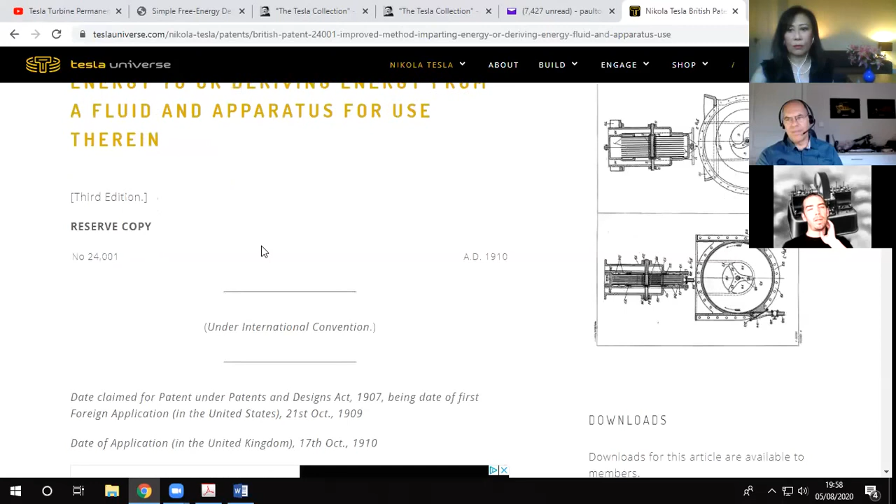Right, I'm just going to open the British patent. Wrong page. Yeah, okay. So a lot of people don't realise that the British patents are not actually the same as the American patents, and therefore they're overlooked completely. Also, there's British patents that don't exist anywhere else. I think this is because Tesla wasn't getting any sort of problem from the British Patent Office, so he decided that this was the place where he was going to unload some other information that he wasn't going to unload anywhere else. I'm just going to go down.

I'm just going to highlight it here. It says, I'm aware that it has already been proposed to effect atomizing by dropping a liquid on a plate rotating about a substantially vertical axis, and I make no claim to the arrangement.

Now, at the bottom of the patent, he left the next clue, where it's got reference has been directed in pursuance of Section 7, subsection 4 of the Patents and Designs Act 1907 to specification number 696 of 1867.

Now, I managed to obtain this patent from the British Patent Office, and it's really interesting that it was a device fitted to Queen Victoria's ship called the Water Witch, and nobody knew how this ship was able to go at such high speeds - it was using the same principles as this patent. The patent is called Improved Method of Imparting Energy to or Deriving Energy from a Fluid and Apparatus for Use therein. The patent from 1867 has almost got the same name as that.

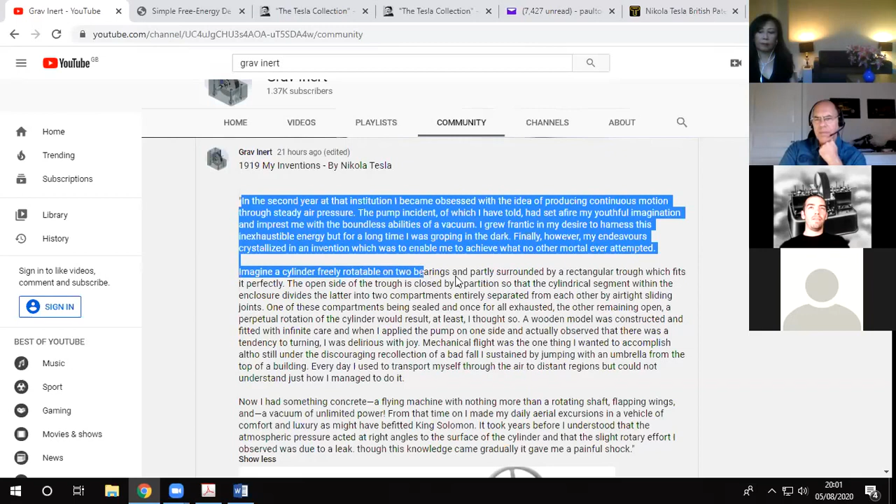It said: In the second year at that institution, I became obsessed with the idea of producing continuous motion through steady air pressure. The pump incident of which I have told had set afire my youthful imagination and impressed me with the boundless abilities of vacuum. I grew frantic in my desire to harness this inexhaustible energy, but for a long time I was groping in the dark. Finally, however, my endeavours crystallised in an invention which was to enable me to achieve what no other mortal ever attempted. Imagine a cylinder freely rotatable on two bearings and partly surrounded by a rectangular trough which fits it perfectly.

The open side of the trough is closed by a partition so that the cylindrical segment within the enclosure divides the latter into two compartments, entirely separated from each other by airtight sliding joints. One of these compartments being sealed and once for all exhausted, the other remaining open, a perpetual rotation of the cylinder will result - at least I thought so. A wooden model was constructed and fitted with infinite care, and when I applied the pump on one side and actually observed that there was a tendency to turning, I was delirious with joy.

Mechanical flight was one thing that I wanted to accomplish, although still under the discouraging recollection of a bad fall I sustained by jumping with an umbrella from the top of a building. Every day I used to transport myself through the air to distant regions, but could not understand just how I managed to do it. Now I had something concrete, a flying machine with nothing more than a rotating shaft, flapping wings and a vacuum of unlimited power.

From that time on, I made my daily excursions in a vehicle of comfort and luxury as might have befitted King Solomon. It took years before I understood that the atmospheric pressure acted at right angles to the surface of the cylinder, and that the slight rotary effort I observed was due to a leak. Though this knowledge came gradually, it gave me quite a painful shock.

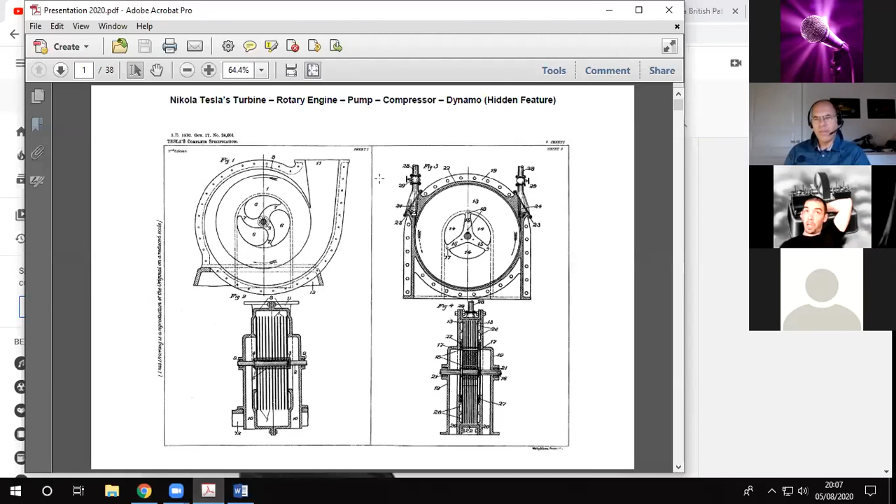Okay, the most important things to remember then. Pontus, can you find that? Yeah, thank you, that was a bit weird. Yeah, I thought it was my computer. No, yeah, thank you Paul. Go ahead. Yeah, okay, yeah, I've prepared—I didn't really have like, Crystal. Me and Crystal didn't speak that long ago, so I've not had masses of time to prepare.

But I have prepared some stuff that I want to go over—mainly stuff that's kind of unknown, really. It's because the British patents weren't found until 1998, and the US patents were actually split into 4 patents. 2 patent applications were denied, whereas the British patent wasn't. So in this patent that I've got open now, which is the diagram from the British patent, there are actually 5 machines within this diagram. One of them's a hidden feature. The turbine is pretty well known.

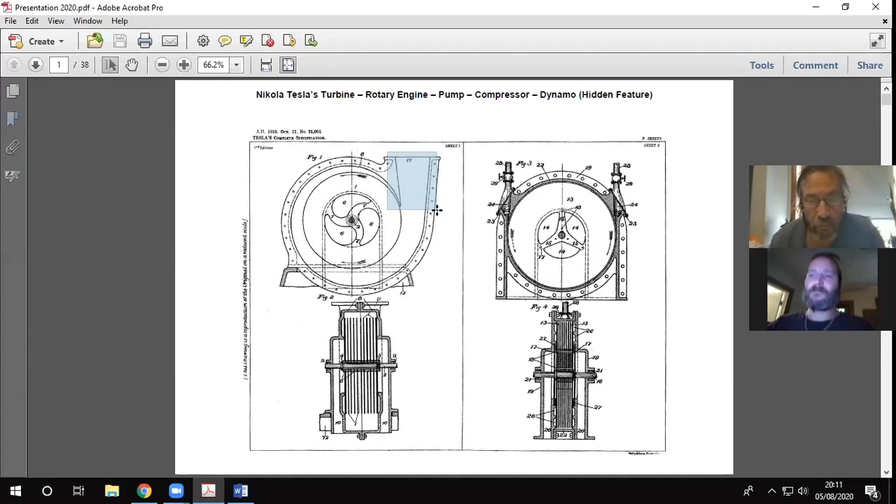So the pump or the compressor will pull a vacuum, but the pump will give cold air, whereas the compressor will give compressed air. Compressed air generally, the more compressed it is in a piston engine, there's a lot of friction to make it. So this isn't using friction by using a piston; it's using the spiral path getting tighter and tighter and tighter.

Now, the next machine that isn't known is a hidden feature. One of Tesla's, I suppose you could say it was a secret there to be found if you replicated his machines, because each of his patents is actually a lesson. If you copy the text and copy the diagram, the words that don't make sense will make sense.

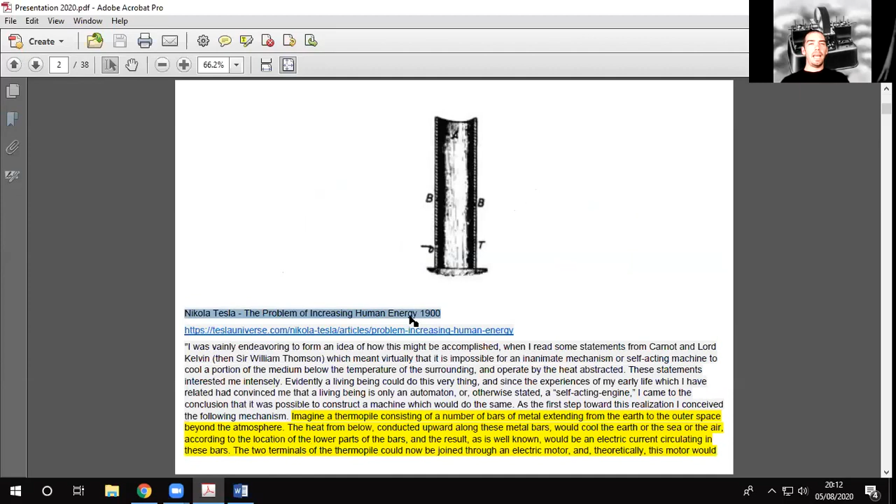So the first time I found any reference to this was in The Problem of Increasing Human Energy, which was written in 1900. Probably one of Tesla's most detailed articles. There's a link there. I'm not sure how I can put that in, but I'll carry on.

Right, I won't read all of this, but I'll read some of it. I was vainly endeavouring to form an idea of how this might be accomplished when I read some statements from Carnot and Lord Kelvin, then Sir William Thomson, which virtually meant that it is impossible for an inanimate mechanism or self-acting machine to cool a portion of the medium below the temperature of the surrounding and operate by the heat abstracted. These statements interested me intensely.

Evidently, a living being could do this very thing. And since the experiences of my early life, which I have related, had convinced me that a living being is only an automaton, or otherwise stated, a self-acting engine, I came to the conclusion that it was possible to construct a machine which would do the same. As the first step towards this realization, I conceived the following mechanism.

Right, this is the bit relating to the dynamo. Imagine a thermopile consisting of a number of bars of metal extending from the Earth to the outer space beyond the atmosphere. That's what this diagram is talking about. There's two bars extending from the Earth to the atmosphere.

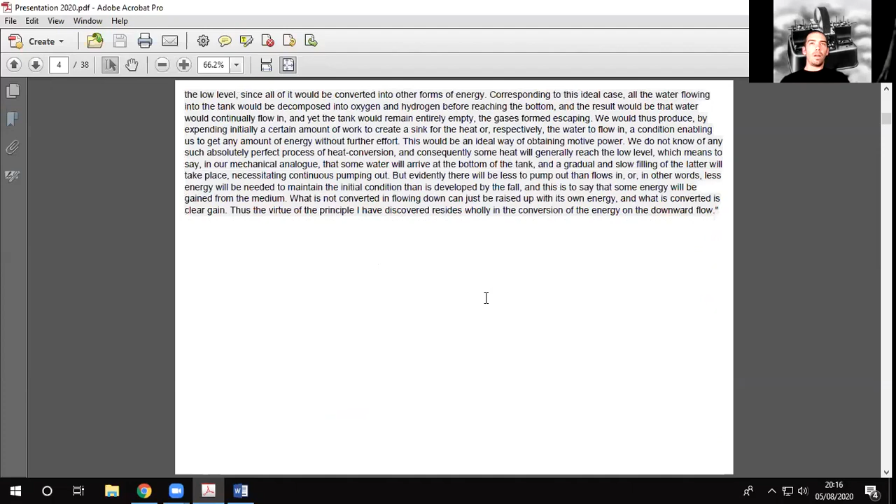Now, the next reference I found of the turbine being in fact a dynamo is going back to Tesla's work in 1891. He's got an article called Notes on a Unipolar Dynamo by Nikola Tesla, and that was in the Electrical Engineer. This is the earliest reference I can find, and there's a couple of little bits I've highlighted where he says, we may explain the operation of such motor just as we can that of a water wheel.

Another one is giving currents of one direction without the employment of commutating devices and at right angles, which was also discussed. I'm just going to open another link.

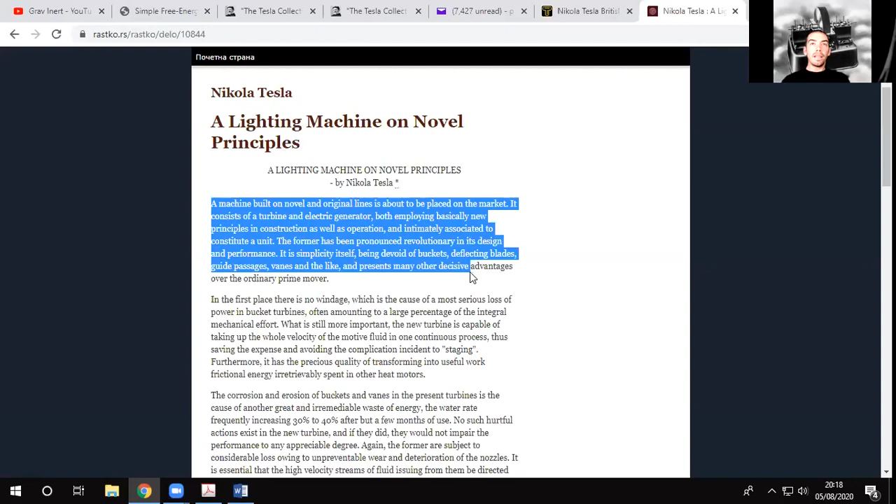This was the next reference I found, that the machine's a dynamo, and this is called a lighting machine on novel principles. A machine built on novel and original lines is about to be placed on the market. It consists of a turbine and electrical generator, both employing basically new principles in construction as well as operation, and intimately associated to constitute a unit. The former has been pronounced revolutionary in its design and performance. It is simplicity itself, being devoid of buckets, deflecting blades, guide passages, vanes, and the like, and presents many other decisive advantages over the ordinary prime mover. A bit further down,

but the merits of this lighting outfit do not rest on the turbine alone. The dynamo associated with the same is perhaps equally noteworthy by its simplicity of construction, high efficiency, and rare and valuable properties it possesses. It consists of a smooth cylindrical body mounted on the turbine shaft and arranged to rotate within a magnetic field of novel form. There is no brush or sliding contact whatever, the current being taken from stationary terminals to which the ends of the generating coils are connected.

Right, I'm not going to read all of that, but I'm just going to go back to this. And this article, Notes on a Unipolar Dynamo by Nikola Tesla, has got diagrams, and you can see that's somewhat similar to Faraday's disc and also a Tesla turbine. It's quite an interesting one to read. I'm not going to read it all out, but I wanted to point it out.

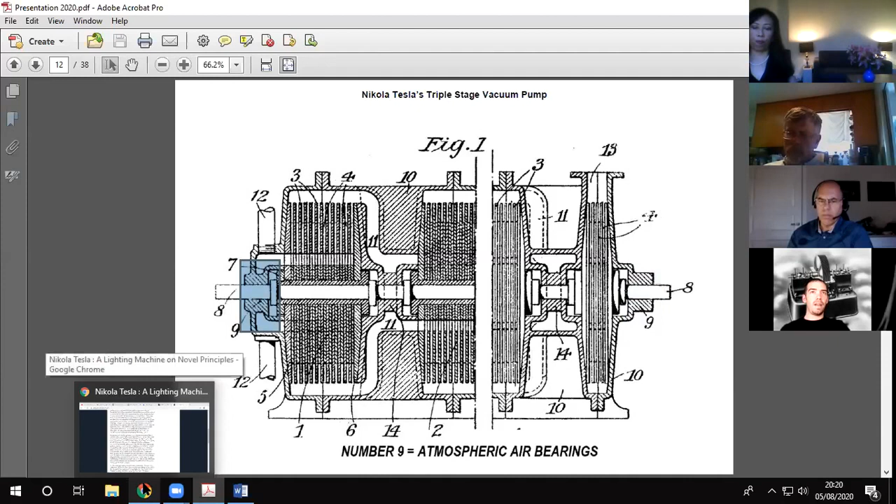How Tesla was able to make the turbine cold and create that heat sink that was spoken about is by making the turbine supersonic using frictionless bearings. Tesla's only drawing that he ever left to do with frictionless bearings was in British patent 179043, and number 9, which is there and there. Number 9 in the description is bearings, and he was able to do this by using ultra tight tolerance gaps. I'm going to show you now how that was done, and it's also something that he used for his earthquake machine, his mechanical oscillator. So I'll show you a video of some very tight tolerance air bearings.

Not going to watch the whole video, I'm just going to find the bit that's relevant. This guy's called Dan Gelbart. This is Dan Gelbart with a short video. Probably one of the most talented machinists in the world. He actually made this lathe and precision grinder. It runs on air bearings, and it can actually machine 1 micron tolerances. So I'm just going to find that bit that I was going to show you.

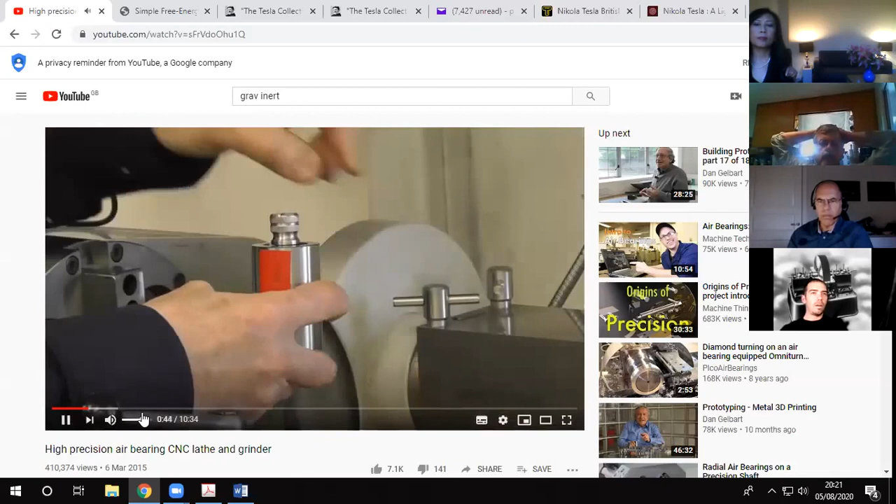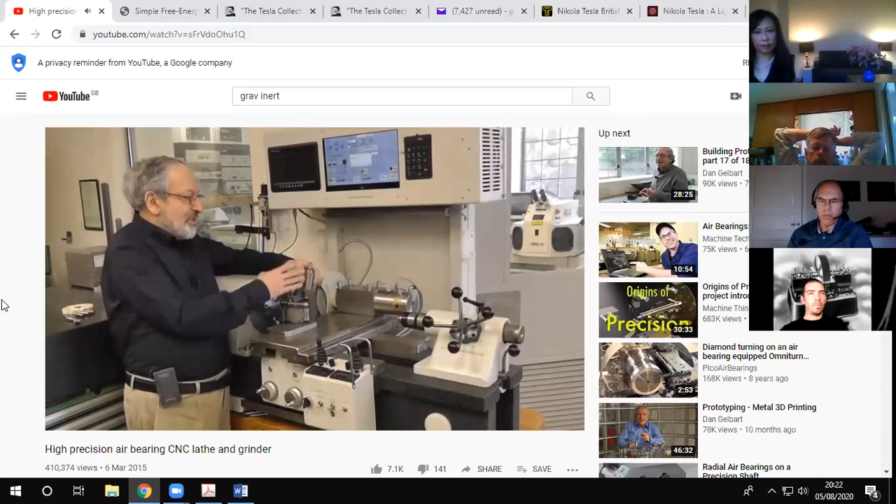Here is a cylinder and a piston which is made on this lathe, and you can see that the piston is a complete sliding fit in the cylinder. It's completely loose fit. Now if I seal off the air vent on top, you can see it's completely airtight. And another nice property, because it's so accurate, if I spin it, it spins freely as if it's on ball bearings, but it spins like a self-acting air bearing. And the same is true if I spin the inner piece, it will spin frictionlessly for a long time. So in other words, a bearing like this will never need lubrication and never wear out, because there is no contact between the inner part and the outer part. You can verify that with an ohm meter while they turn. It's the same idea as air bearings in a hard drive or other self-acting air bearing devices. So this is one example of a part that, to do it without a machine like this, you'd have to do by time-consuming lapping, and it will be quite hard to get parts to fit to that tolerance. On this machine, it comes out like this straight off the machine. So now let's go over the piece by piece.

Right, I'm just going to show you that's using 1 micron tolerances. So it appears Tesla was able to achieve some very tight tolerances even back then. I've got a feeling he was building his own machines with his machinist, and of course he was able to afford the best machinist that existed. This is another process that uses slightly less. This uses 8 micron tolerances and a surface treatment.

Hi, I'm Mike Kojima, and I'm the engineering editor for MotoIQ.com, and we're here at WPC Metal Treatment today, and I'm with Izumi Ogawa from WPC, and we wanted to show some quick little demonstration of some of WPC's properties. Now, WPC isn't a coating, but it's a metal surface treatment, and the process actually modifies the surface of your part for better fatigue strength and less friction.

It doesn't change the clearances or the geometry of the part at all. We've measured things very carefully, and even on delicate metal surfaces, it doesn't distort or change the surface at all. So it's perfectly safe on things like bores, close tolerance grooves and complicated geometries. It won't change fits or tolerances.

And we wanted to demonstrate the anti-friction properties. Izumi here has a ground steel rod and a cylinder with a bore, a ground and honed ID, so the tolerances are pretty close. The clearance between this part and this part is 3/10,000ths of an inch, which isn't crazy. It's looser than a typical piston pin fit, for instance.

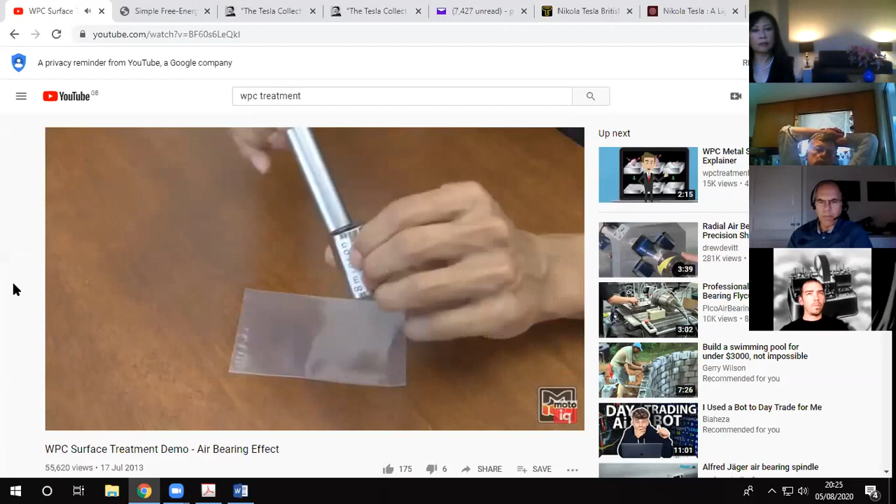There's no lubrication, and it seals better. So if I push and spin, it spins like this. It's floating. Yeah, it's spinning and sealing, and the clearance is not a particularly super tight clearance, so that's pretty amazing, I think. No lubrication either.

So in Tesla's vacuum pump, he was using something similar, but at the same time, the rotor spinning was allowing atmospheric pressure to rush in and fill that ultra tight gap on this side and this side. So it was a combination of the effects I've just shown you and using atmospheric pressure to support the weight of the rotor. This is called an aerodynamic bearing, and there's another type I'd like to show you.

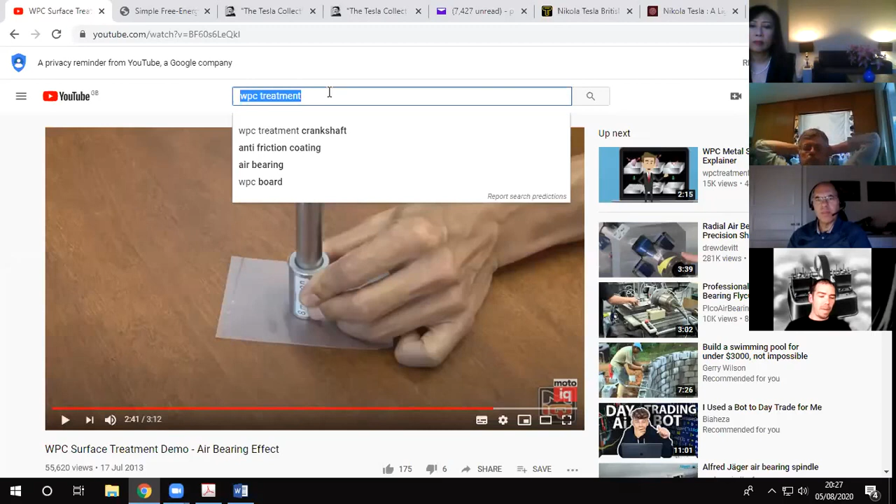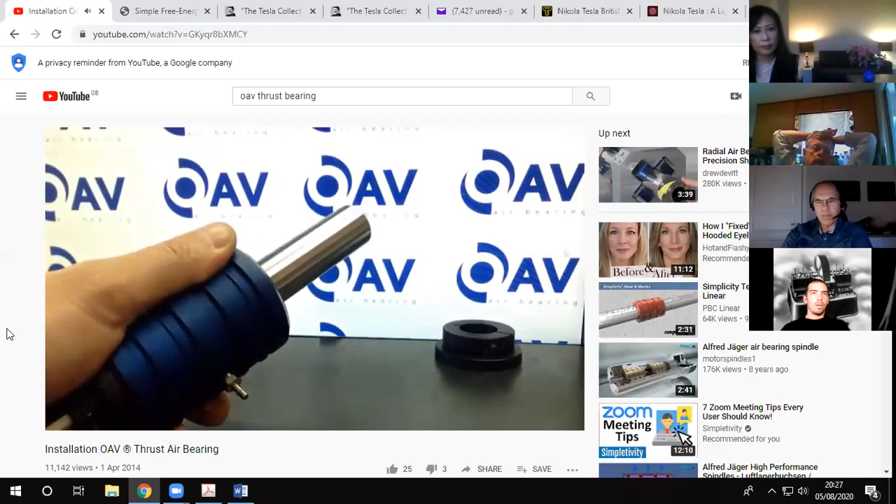This is an off-the-shelf air bearing. It's an aerostatic bearing that anyone can buy. They're not particularly cheap, but when you're dealing with this level of precision, you're going to pay for it. The tolerance on this is about 17 microns between the shaft and the thrust air bearing. I'm going to mute it. This particular one's got two shaft collars that are fixed to the shaft.

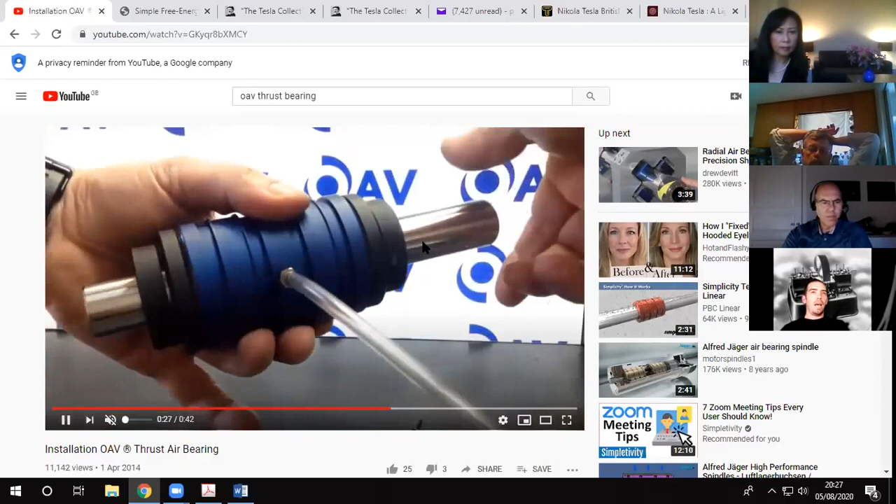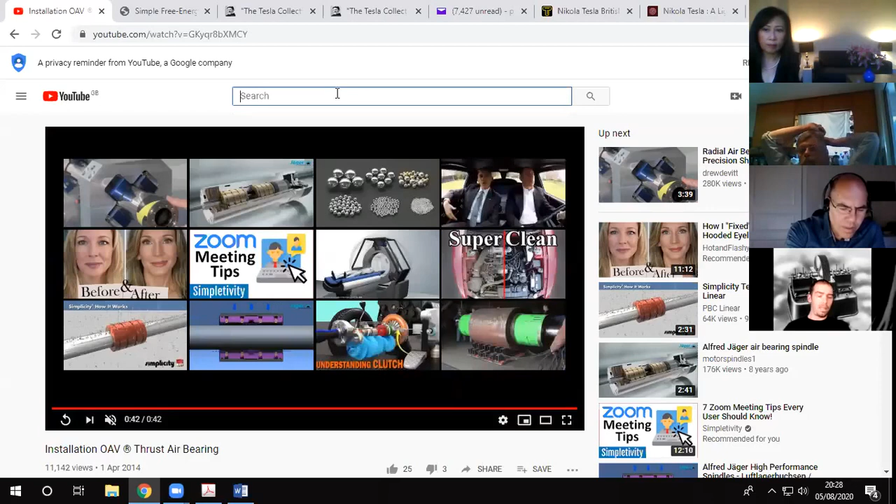If this was used in a Tesla turbine application, the casing would have to replace the shaft collars, and the rotor at the other end. Or you could have the bearings internally or externally. But yeah, there's one more type of aerodynamic bearing that I'd like to show you, and that's called a foil bearing. This is actually an English company.

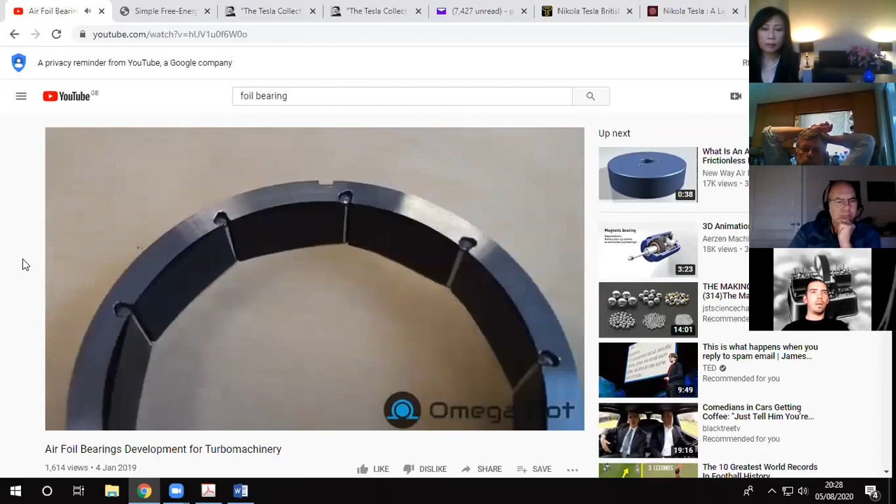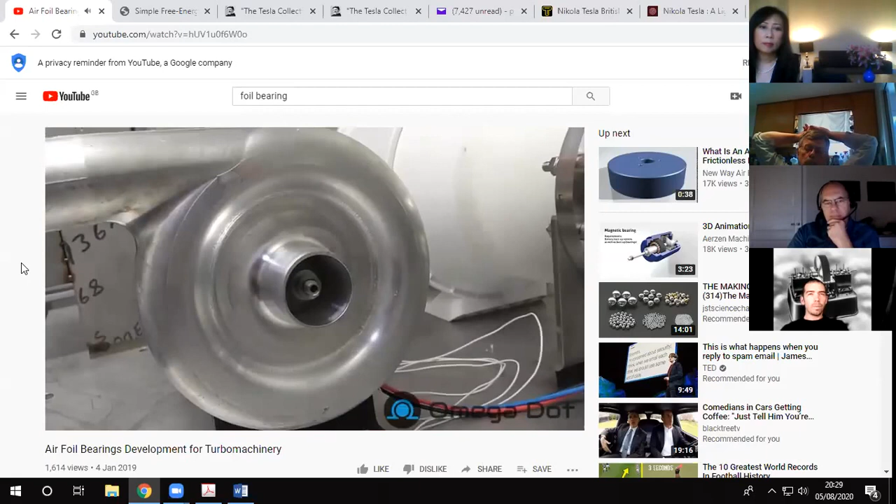What's actually happening with these is they're not frictionless from the start. The faster they spin, there's a pattern, I'll show you in a minute, that pushes the bearing away from the shaft. This is the type of bearing that's used on modern turbo machinery.

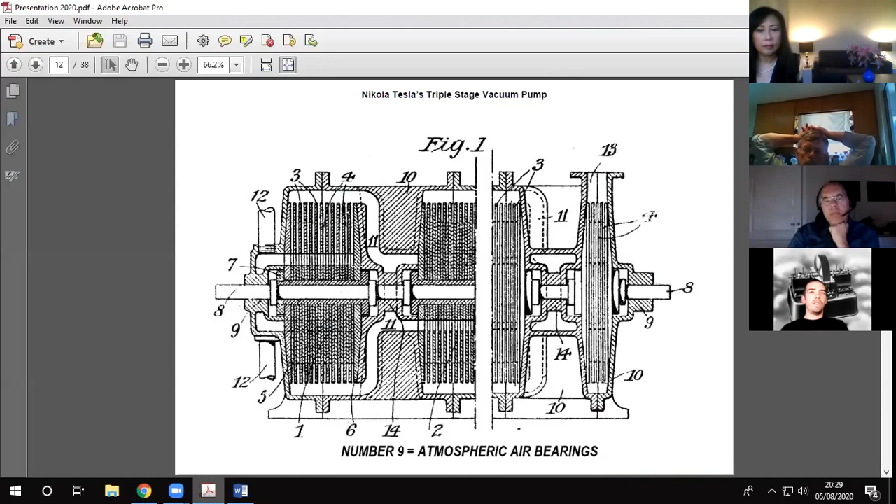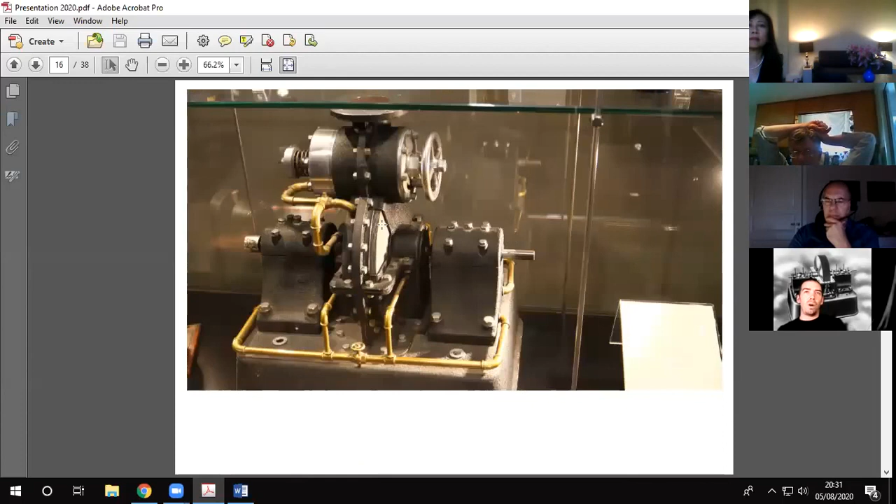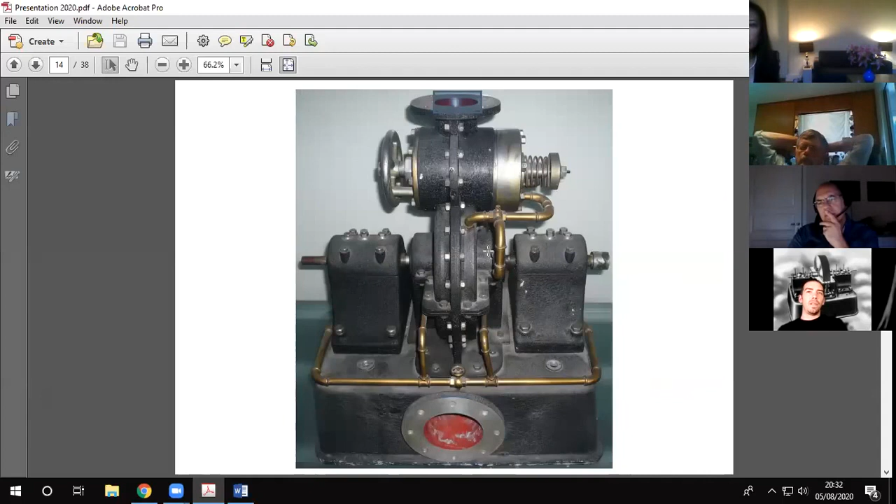This museum device is quite interesting. It's been disabled; they've actually cut a section. I think Tesla had a section cut out of it; I don't think the museum did it. So if that section was repaired and a large vacuum pump was applied to the exhaust here, atmospheric pressure would rush in through the inlet and levitate the shaft and the rotor, and that's how this rotor was designed to be started, using high vacuum.

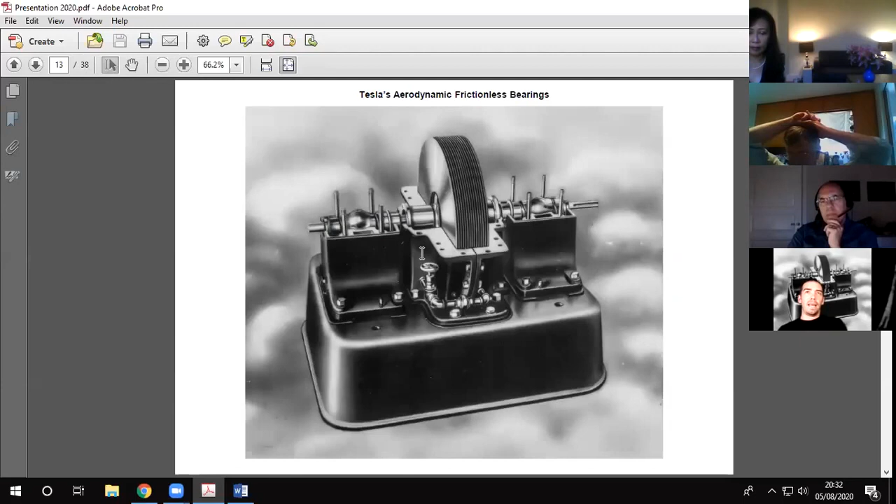This was Tesla's later design, his 1921 design, whereas this is Tesla's 1911 design. So these are aerostatic bearings that are available off the shelf, that you can literally incorporate straight into a Tesla turbine.

I'm working with an engineering team based in Sweden who have a family business engineering company, and I've ordered a set of these bearings for those guys, and they're building one of my latest designs. The company that manufactures these air thrust bearings is called OAV. There are 3 porous carbon media air bearing companies, and strangely they're all in America.

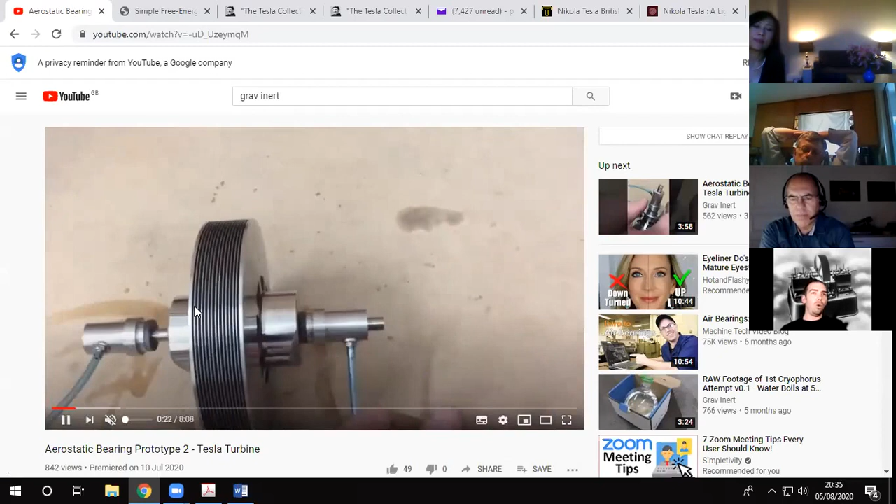I did have a go at manufacturing some, and what was found was that... I won't play all of this. What was found is that the surface area, I've just turned the air on, the surface area of the shaft and the surface area of the bearing has to be sufficient enough to hold the weight of the rotor and the axle.

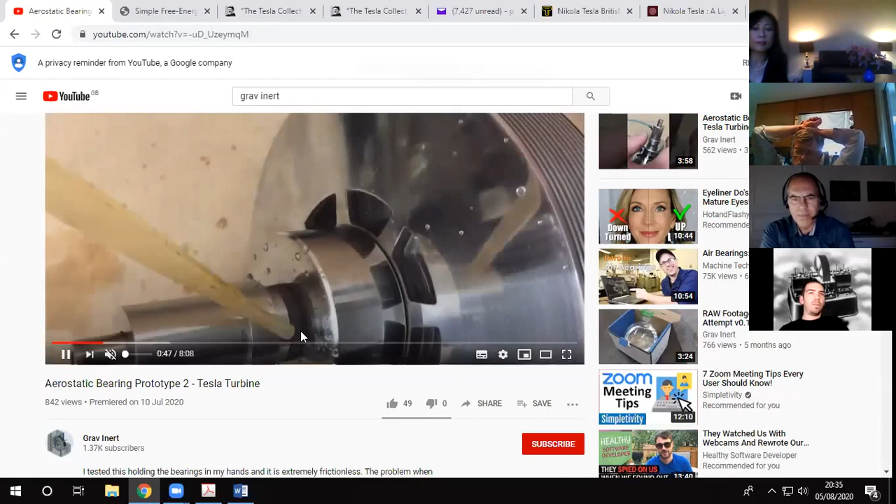Since this one, Graham, who's also part of FESIG, helped me refine the design on this. What was discovered is if you put your finger over the end of the air bearing, it all of a sudden becomes a lot more powerful. But the downside to these is you need compressed air. So for a minute, I've shelved this design, and I've now got a permanent magnetic bearing design.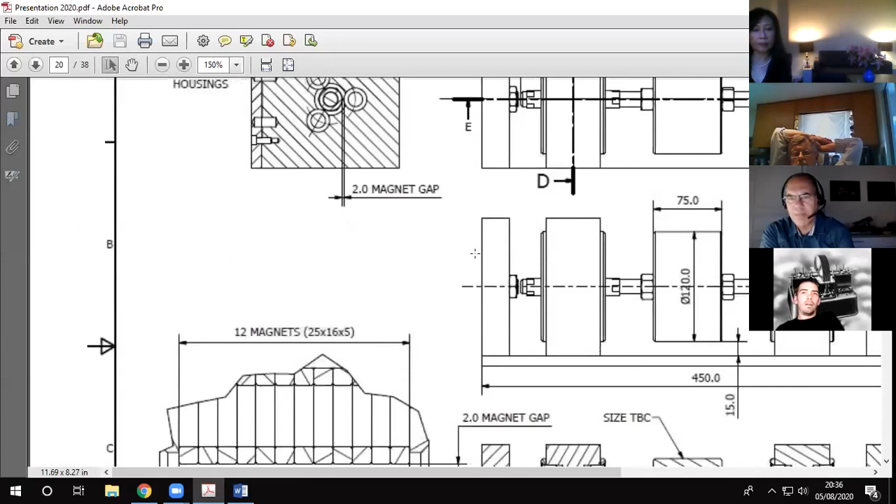This isn't actually the finished version, but it kind of gives you a clue. I'll just zoom in a little bit. So there's a magnet housing, two magnet housings, one here, one here. These are just 1 kilo magnets in here. There's just one in each end to stop it moving left and right. And then in each magnet housing, there's actually 12 magnets, but times 3.

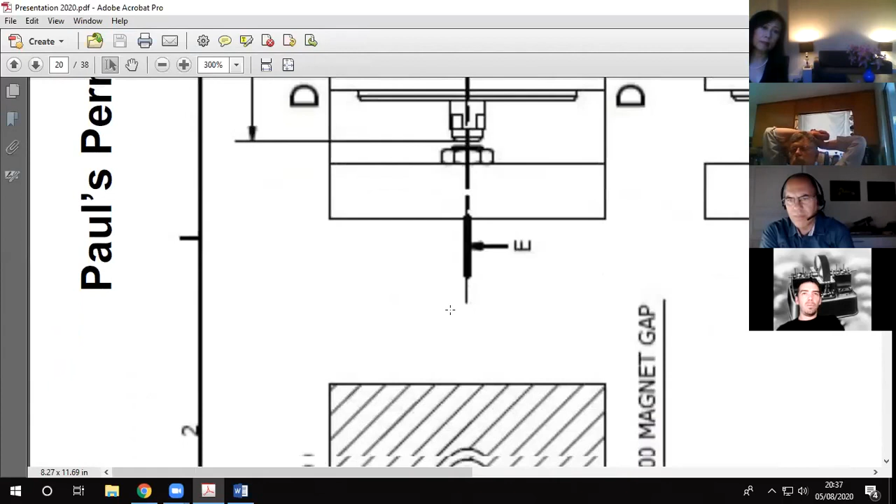So what I found out is the perfect shape, it appears, for a permanent magnetic bearing is actually an equilateral triangle. And the reason for that is, here's the shaft, you're looking at the side view, there's only one set of magnets pushing down and 2 sets of magnets pushing up. So this design works very well for a horizontal axle or for a vertical axle.

Whereas my latest video, which I'm just going to show you some of now, I'm not going to play all of this because it's quite long. What's wrong with this design is there's no opposing magnet there. This aluminium bit here is just used as a weight. Now you can tell this is frictionless because it will spin backwards and forwards like that.

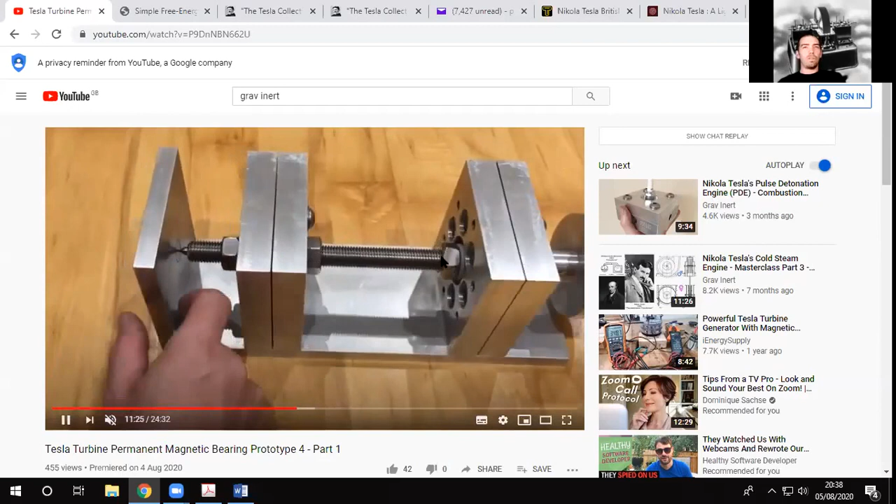That's how you can always tell if a shaft's frictionless, especially if there's a heavy spot. You can easily put a bit of Blu Tack onto a shaft, and if it spins backwards and forwards like that, it's definitely frictionless. So the weight that's on that needle point there, if you put it on a scale, it would be next to nothing. It's just stopping it throwing to the left. I'm just going to go forward a little bit more.

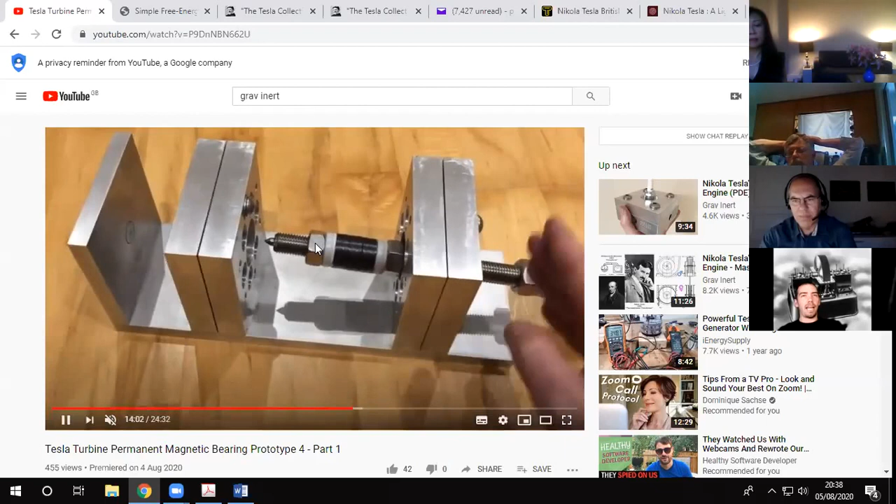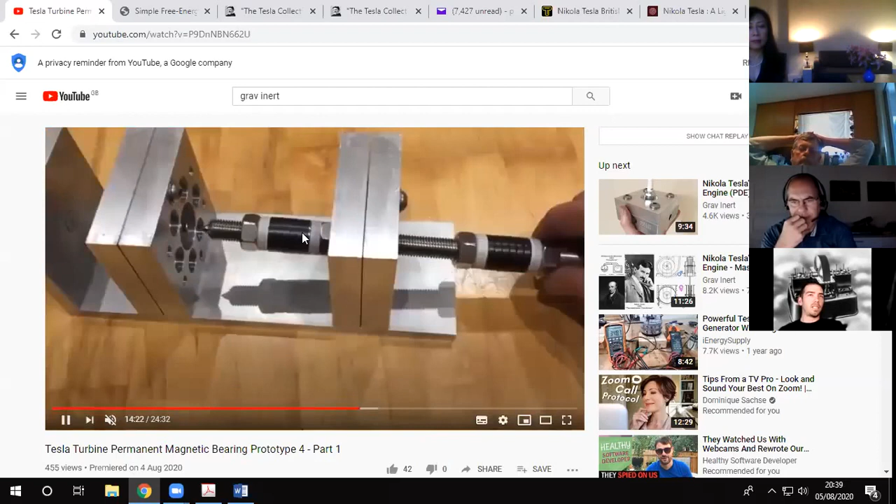There's 6 magnets on the shaft there. These are nylon washers. All this metal is aluminium. The shaft's stainless 316 because it's not very magnetic. The point and where it touches is hardened tool steel. There's actually 36 magnets in this housing, and 36 in this housing, 6 lots of 6, whereas the new design has 3 lots of 12.

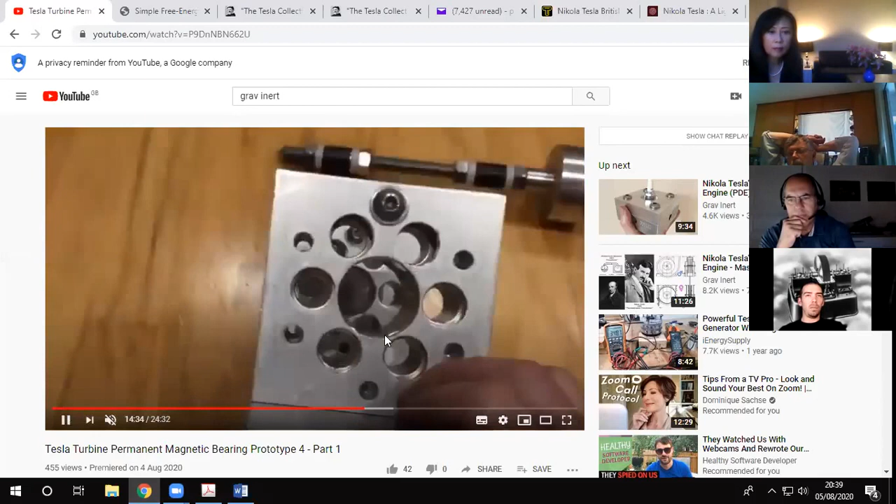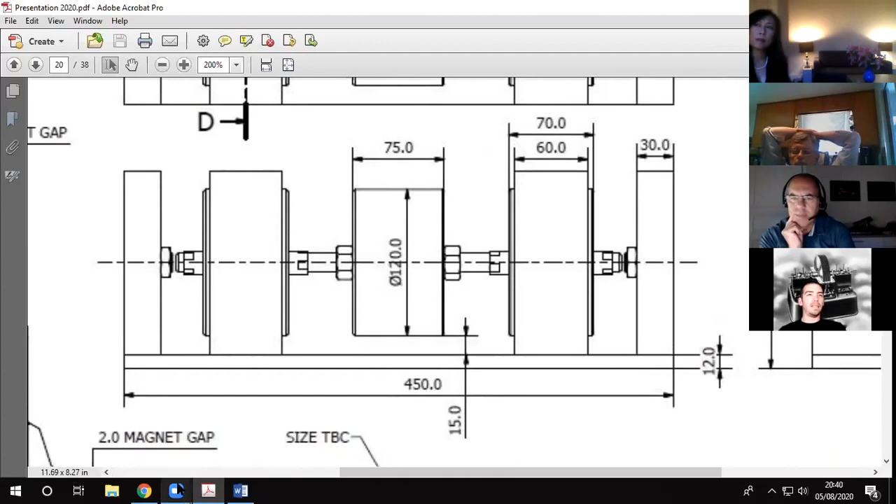With permanent magnetic bearings or air bearings, the longer the bearing, the more magnets there are in a row, the more stable the X and Y axis is going to be, and that's quite important because if you want to use magnets for repulsion on the end of the shaft, then you can't have powerful magnets here, because magnets in attraction will pull together and they'll pull to center.

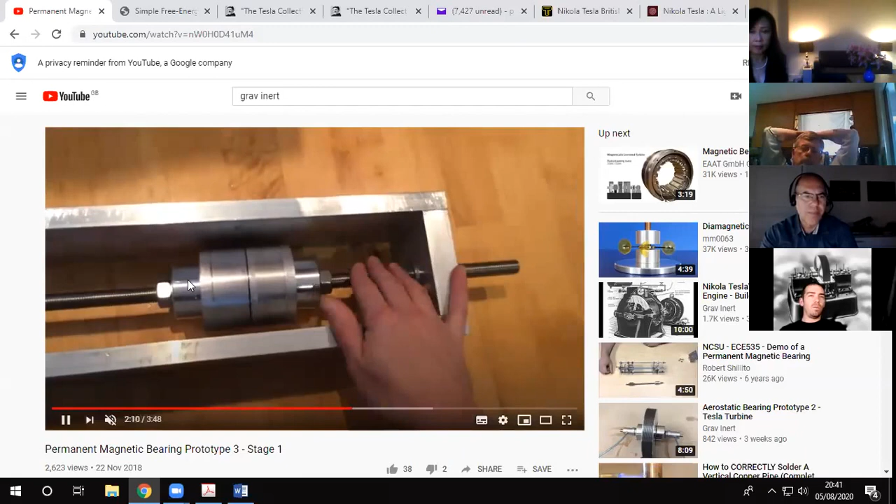And the problem with this design is 120 kilo magnets are really scary to work with. It's like having a loaded gun. It's more dangerous than a loaded gun.

Whereas with this design, the side view's better. The magnet in here can be adjusted in and out. There's a hole here, so you can put a screwdriver in and wind the magnet in and out, and you can do the same this side.

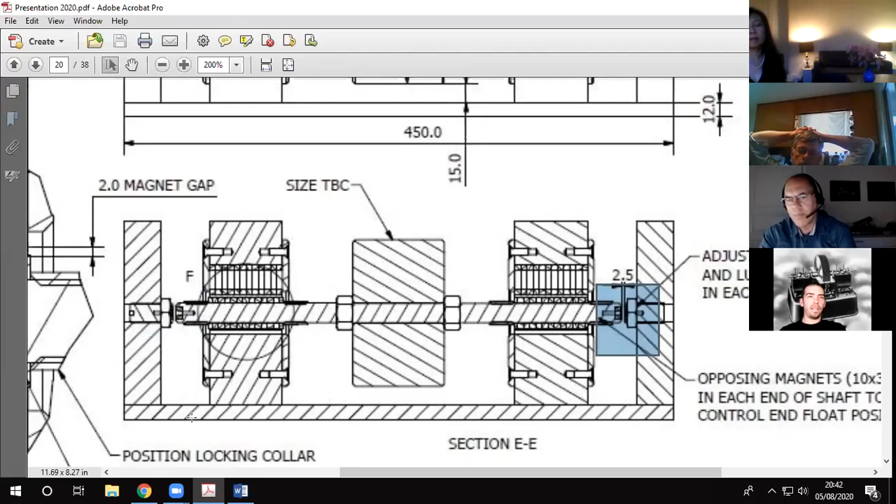And the aim of the game is to actually align all the magnets on the shaft with all the magnets in the housing. When you get dead center, it's a fine point of tuning. The shaft's not trying to throw itself left or throw itself right. There's an equilibrium point, and you can only achieve it with either two needle points on each end, or what I'm trying with this new design is to use two magnets in repulsion.

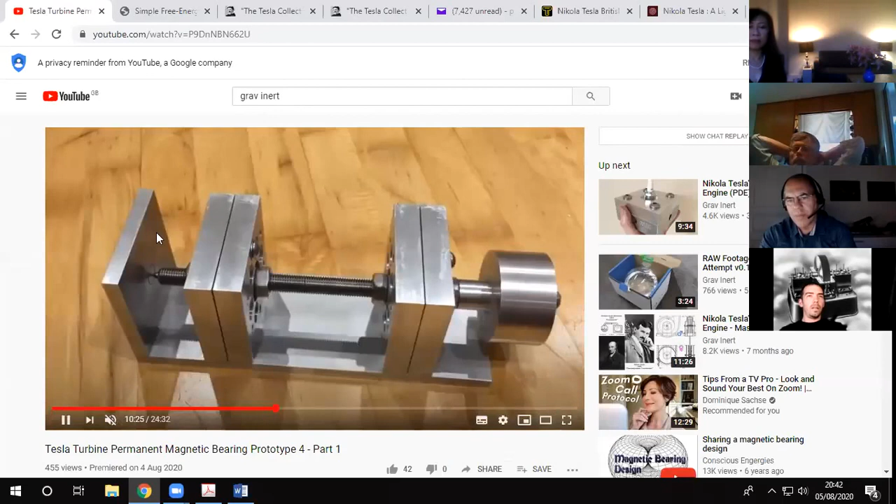I'll just find a video, a bit of that where it's actually spinning. Hang on. There you go. You can see it's got a bit of buoyancy here, but the weight isn't in the center and it's not balanced. And yeah, you can see it's not taking really much effort for it to spin.

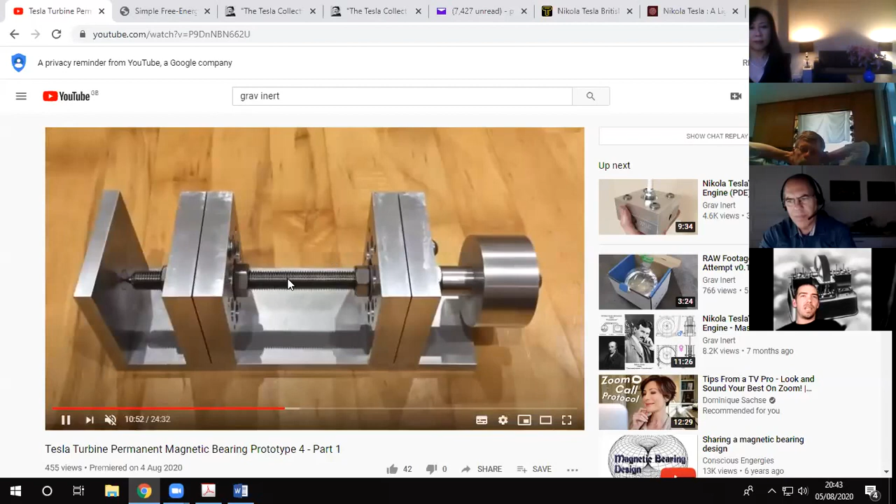So when you've got a frictionless bearing and a Tesla turbine, and you create that draft, just like when you open the front door and the back door slams shut, the frictionless bearing is throwing the block of wood in the gap in the door and keeping that draft open, and it's the draft that we're harnessing. So yeah, I think that's kind of it for now on the magnetic bearing.

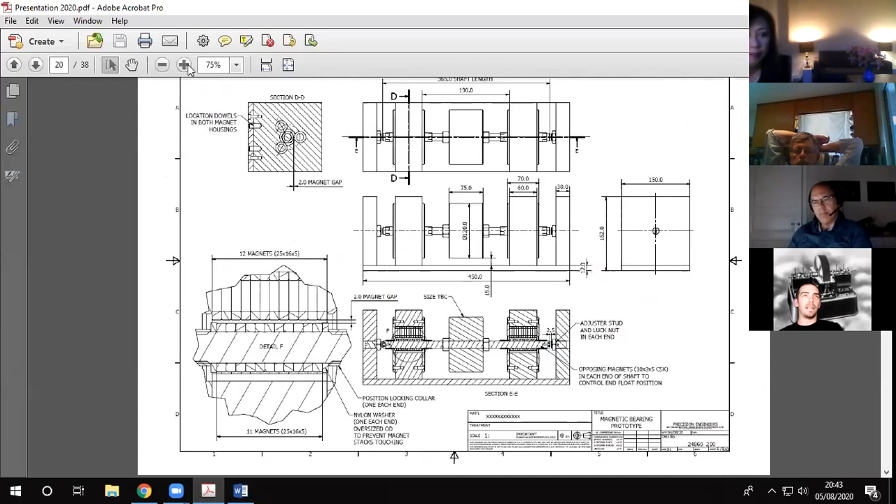I wanted to show you some of Tesla's other stuff that I've been working on that you might not have come across. The first is the hovercraft. Not sure if anyone's seen this before. Nikola Tesla's got a hovercraft, and it dates back to 1908. Now, it's not a particularly good quality drawing, and it's a little bit hard to wrap your head around if you're only just starting to understand the capability of what a Tesla turbine can do when running supersonic.

This is a water tank, and this is a gas tank. Now, you might think, why has it got a big water tank and why has it got a big gas tank? Is it going to run on water or is it going to run on gas? Now, this is actually the starter motor. These form part of the starter motor, and there's some bits that aren't fully shown.

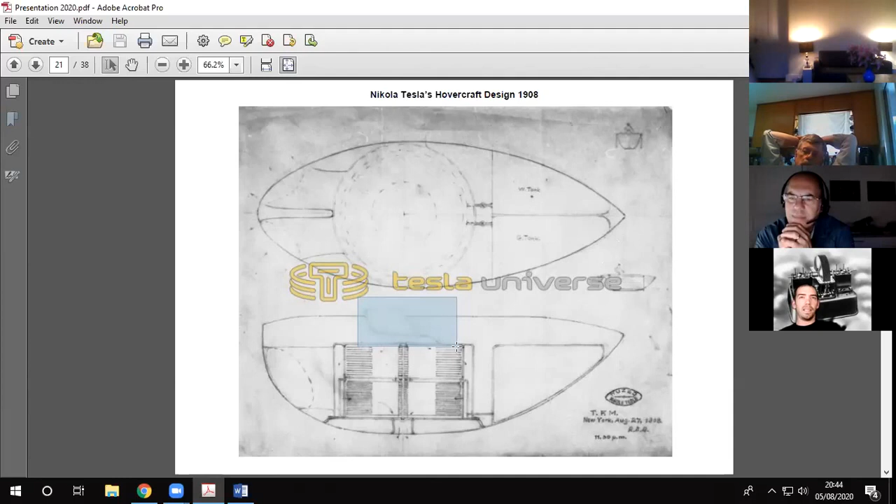You can just about make out there's a man or a woman sitting on the hovercraft there, and this is a seat. That's a seat there, and this bit here, it looks to me like it's a two-stage turbine and pump. There's some arrows which you can barely see. There's an arrow coming in there and there, and arrows going out there and there, and arrows coming in there and there, and then arrows going out.

Now imagine if the flow was just going in one direction, the flow would be coming out of here, and if it was at supersonic, it would be air mass that's coming out. This doesn't work like a jet engine. It works using air mass rather than air velocity, which is also how Tesla's flying machine works.

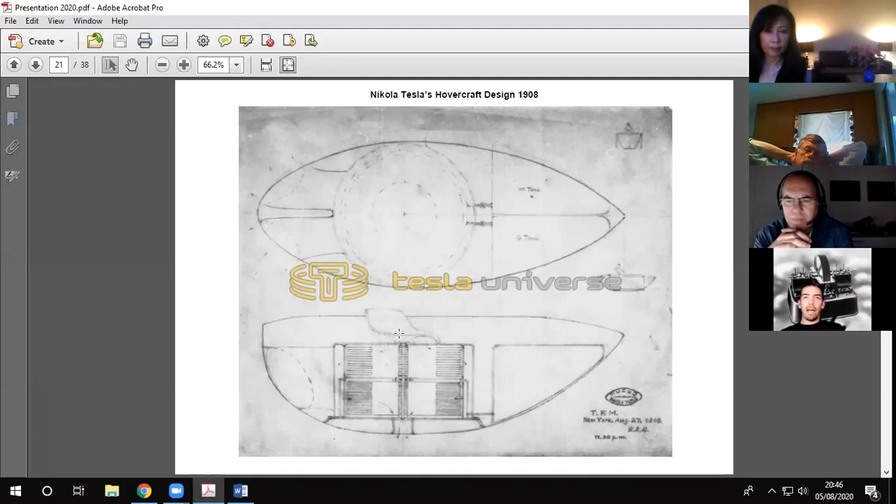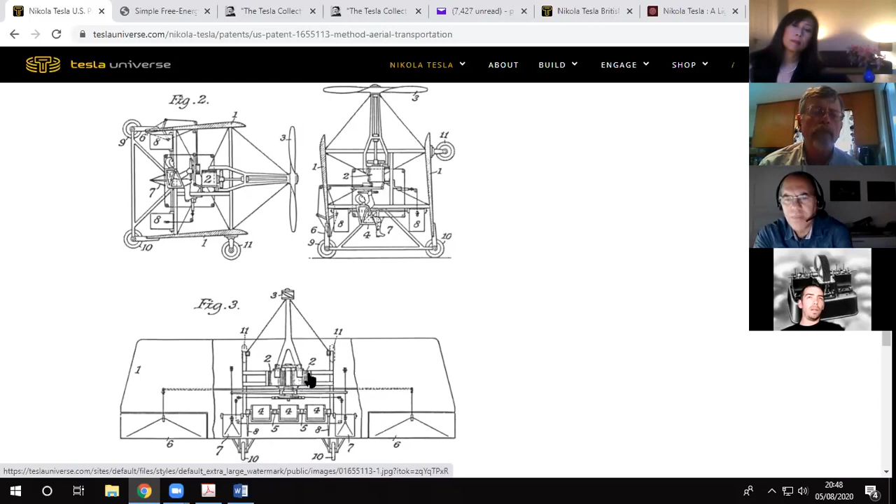And if I then go to US patent 114, if you look at the dates, application filed October 4th, 1927, patent granted January 3rd, 1928, and the patent number is 1655114.

So Tesla had to submit this as, it says here, this application is a continuation in part of my application serial number 499518, filed September 9th, 1921, and is made pursuant to the rules of the Patent Office, its purpose being to describe and claim apparatus which I have invented for carrying into practice the method therein disclosed. Now, what that means is that the Patent Office denied the patent application in 1921 because it didn't have a fuel tank.

But then the French, and the British patent, and there's some more. There's an Italian one I've not got hold of yet. And I think there's some more as well that never had a fuel tank. So if you look at this one...

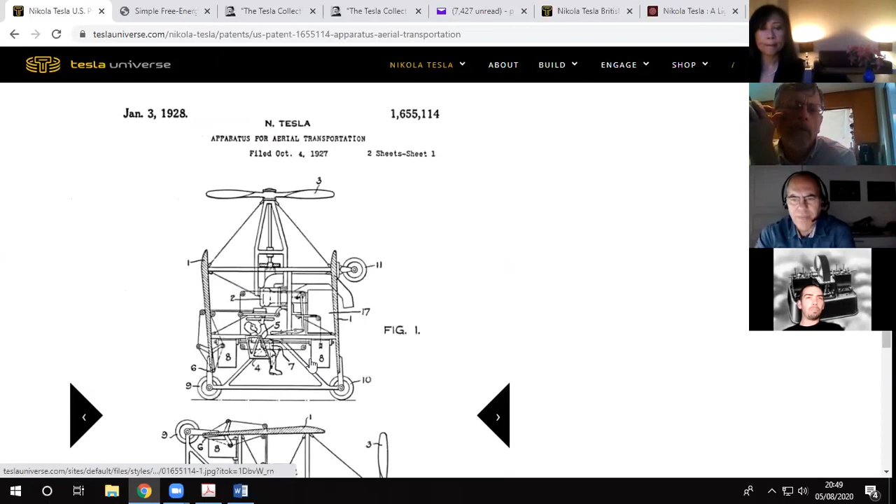Number 17 wasn't there in the previous one, and then out of the twin turbines now you've got an exhaust coming out that wasn't there before. So there's the fuel tank and the exhaust.

But then if you read the patent description, it says here in figure 3, this apparatus is diagrammatically indicated by 17 and may be one of any number of well-known types producing pressure by internal combustion of suitable fuel, or by external firing of a steam boiler. Now, the steam boiler is interesting because I figured out that...

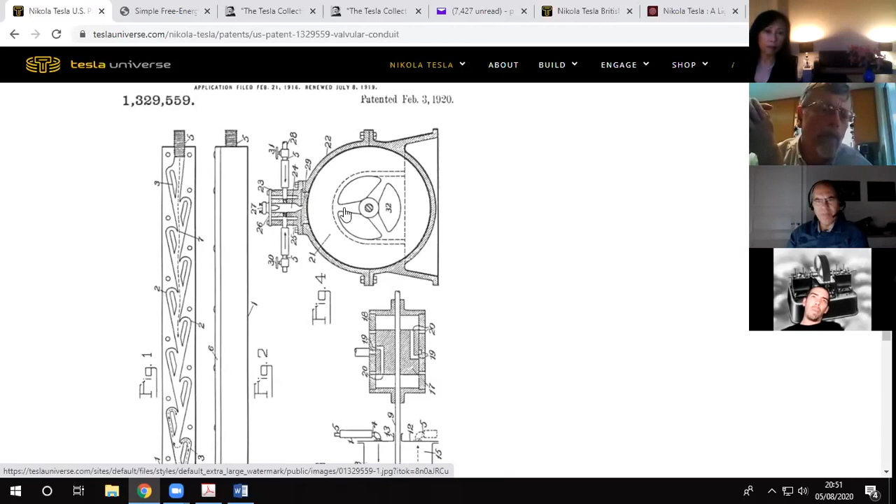I figured out that Tesla's valvular conduit patent, figure... yeah, I haven't got it. If I can rotate that.

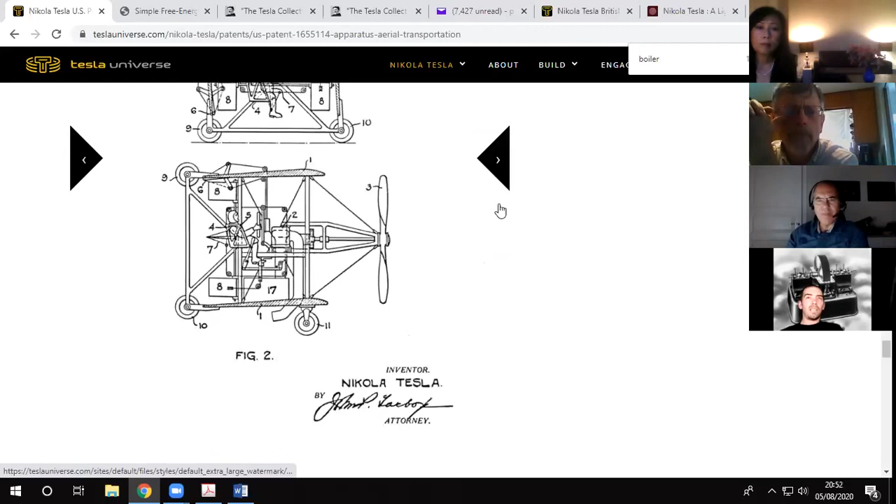Figure 4, this here, this device on the top is actually a low pressure superheated steam boiler, and I've actually replicated that. I've got a working replication of it. And what Tesla was talking about in the previous patent, where he's talking about firing of a steam boiler, the number 17, as this is Tesla's final design, Tesla showed how to incorporate a steam boiler, which is actually a pulse detonation engine.

And I'm just going to get that back up. Hang on. Oops. Yeah, the...

Valvular conduit patent is a very interesting patent, actually, because there's a bit of history behind it that a lot of people don't know about. It was originally submitted on February 21st, 1916, and if you notice, it didn't get approved until February 3rd, 1920. It was actually kicked back, and Tesla had to take some information out because it conflicted with another inventor's work. I found that out from the 33 denied patent applications book that I got from the museum.

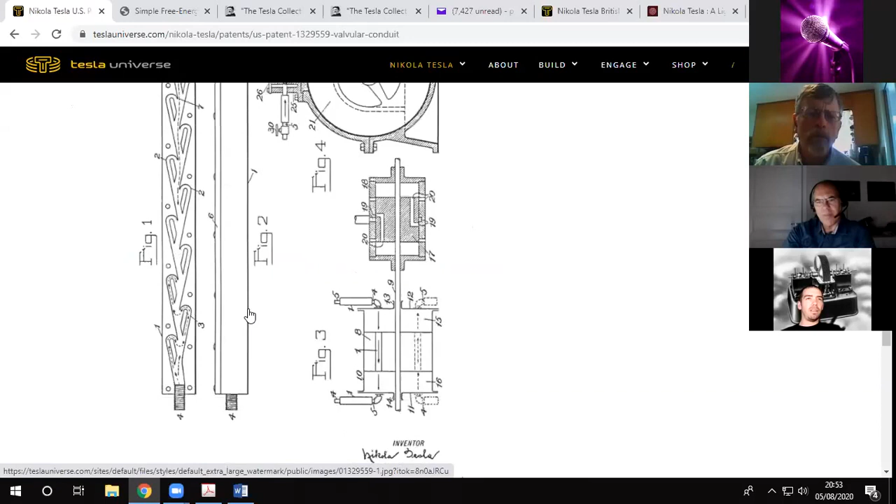And in this diagram, it seems that a lot of people have given full attention to figure 1 and figure 2, and there's various different replications of people making a valvular conduit on YouTube. But they didn't really fully understand what it was supposed to be used for. It's got 2 purposes in Tesla's machines.

One is in this pulse detonation engine. I can tell you it's a detonation engine because if you search detonation, detonate, it does say a fresh mixture which is detonated as before. So...

There's another thing in here that's quite interesting, and it says such a machine is a thermodynamic transformer of an activity surpassing by far that of any other prime mover, it being demonstrated in practice that each single disc of the rotor is capable of performing as much work as a whole bucket wheel. Yeah, I'm not going to read all of it.

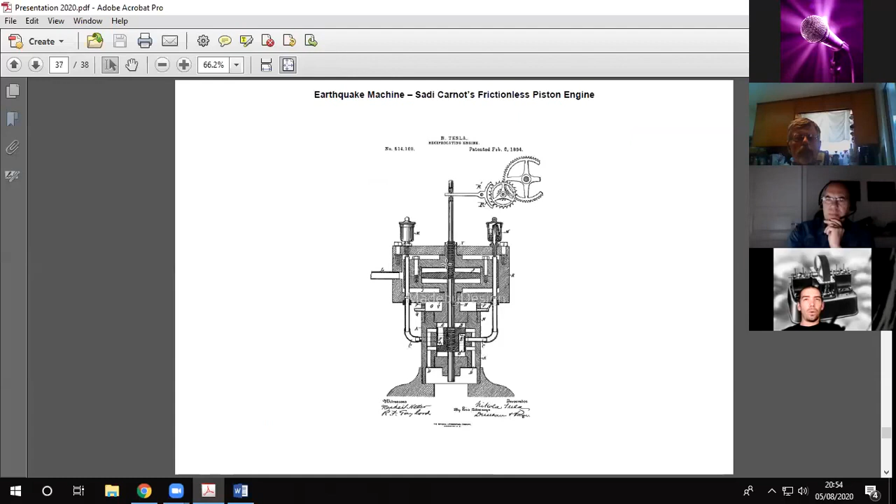The other interesting thing which has been overlooked is figure 3. Now, figure 3 is actually Tesla's final design for his earthquake machine, his mechanical oscillator, which can be seen in... you might be familiar with this one. This is from February 1894, Nikola Tesla's reciprocating engine. This was the first time he patented his mechanical oscillator to run off steam. And another secret with that was it would also run off atmospheric pressure.

And this bit at the top, which would be this bit here, which would be moving up and down like a linear actuator, would be able to generate electricity using the opposite function of a linear motor, or move mechanical machinery with some strange mechanical contraptions. But this was the basis of Tesla's mechanical oscillator. This was his final design, which incorporates 2 valvular conduits, which actually turns this machine into either a pump or a compressor.

So if I search pump, figure 3 is a diagram illustrative of the application of the device to a fluid propelling machine such as a reciprocating pump or compressor. So if I search... yeah, will result in a compression of the air at 4 and rarefaction of the same at 5.

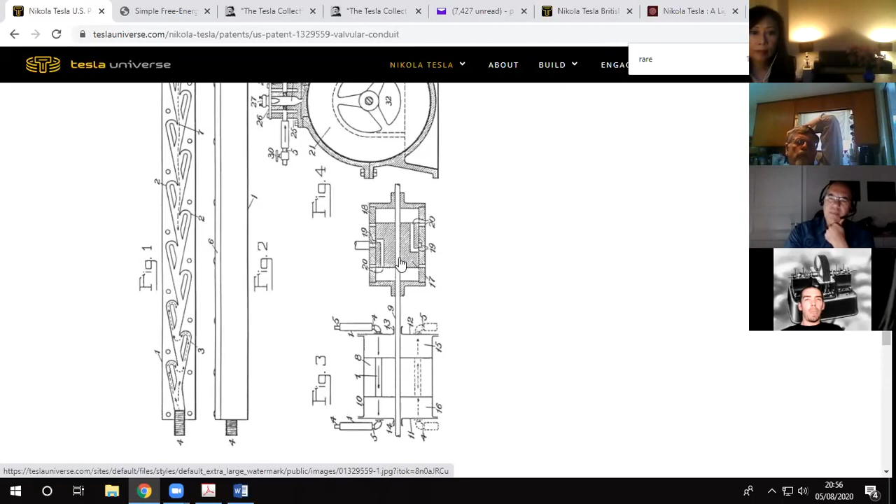So what Tesla's basically saying is this machine here is a free energy device. Once started, it uses 2 valvular conduits to tap into the invisible evaporation cycle, and it can produce either vacuum or compressed air. This mechanical oscillator is the piston version of the Tesla pump, or the Tesla compressor with the teardrop shaped holes. And the mechanical oscillator is actually this one.

And this one is actually Tesla's replication and improvement of Sadi Carnot, who the second law of thermodynamics is based on the work of.

If you don't know, Sadi Carnot was born in 1796 and died in 1832, so he wasn't particularly old. He was only 36, but at the age of 27 he expressed the first successful theory on the maximum efficiency of heat engines. So the whole second law of thermodynamics falls back on a 27-year-old Sadi Carnot.

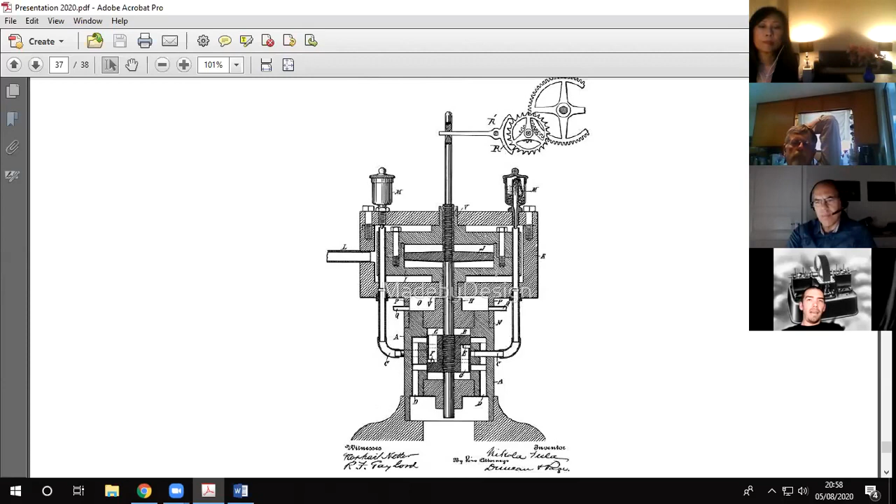He basically theorized a frictionless piston engine, whereas Nikola Tesla actually built the theoretical frictionless piston engine using the method I showed you earlier of having ultra tight tolerances, so the piston and the cylinder become an air bearing, and then he refined it to make electricity or mechanical movement.

But then Tesla realized that the weakest link in this was the piston, and the fact that it had got to go backwards and forward, making 180-degree reversals, and that is where the energy is lost. So Tesla then conceived the Tesla turbine and the Tesla pump as rotary engines to basically eliminate the 180-degree reversal.

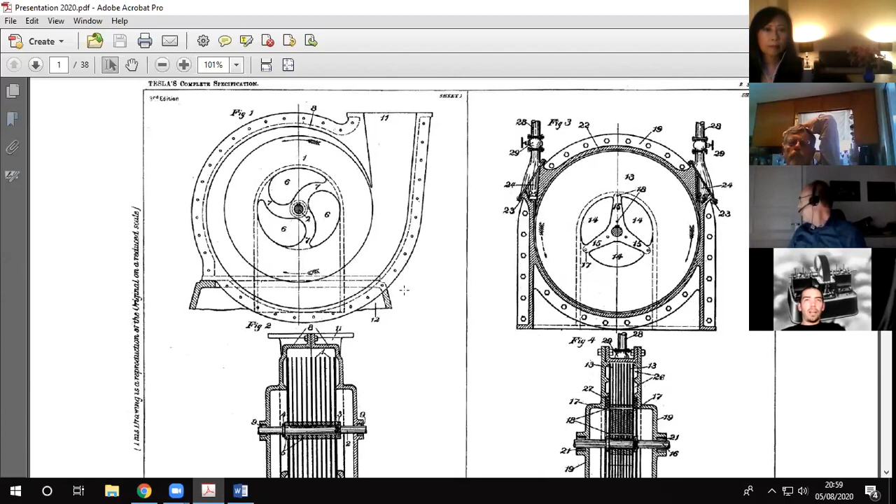Sadi Carnot's work is still to this day reflected upon as the laws of thermodynamics, and Tesla's work on the reciprocating frictionless piston engine and the mechanical oscillator are completely unknown.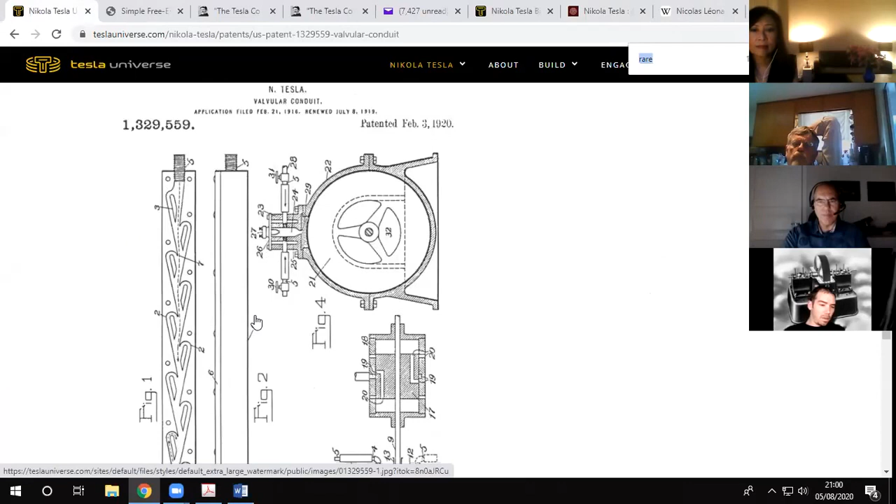This particular device, it does say in the patent: this arrangement is familiar, being representative of a prime mover of my invention termed mechanical oscillator, for which it is practical to vibrate a system of considerable weight many thousand times per minute.

Just to open a quick calculator - if you've got something going thousands of times a second, let's say it's doing 2,000 times per second times 60. If that was a piston engine doing 2,000 times per second, that would be the equivalent of a 4-stroke engine doing 120,000 RPM. So divide that by 2, that's 1,000 - a mechanical oscillator doing 1,000 times per second would be the equivalent of a piston engine doing 60,000 RPM.

Now, if you look up highest RPM piston engine - let's try Formula One - Cosworth was able to achieve about 20,000 RPM.

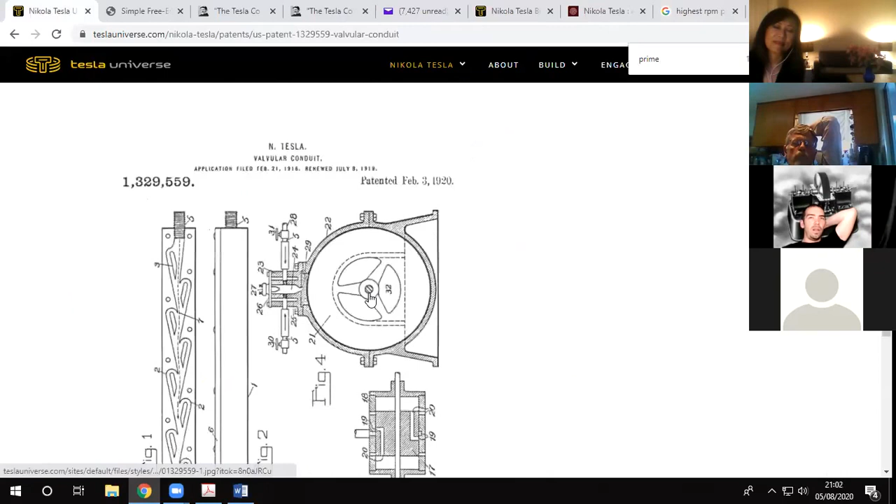Now, the reason why Tesla's reciprocating engine is able to do much higher RPM is, firstly, it doesn't need oil because it's using an air gap as the frictionless part. So if there's no contact between the two parts, the oil's not getting hot, the heat isn't there. Also, there's no crankshaft on this device or this device, and the con rods and the crankshaft are really the weakest link in a high RPM engine.

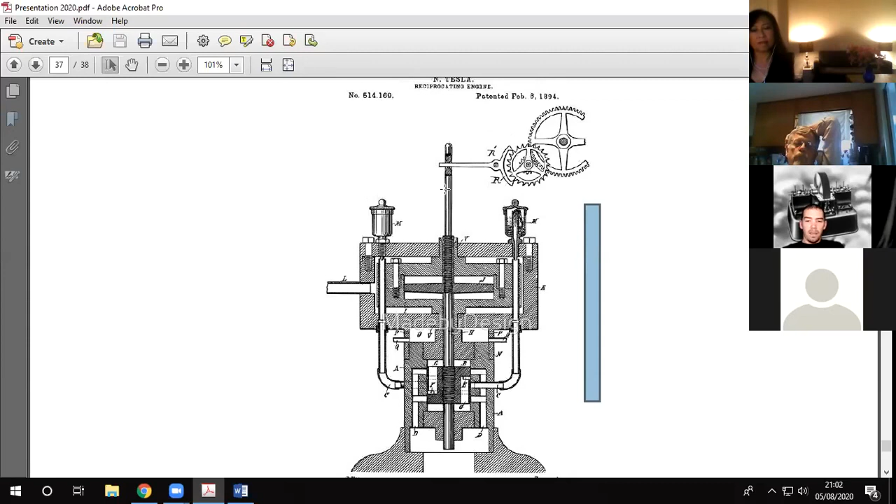So back in 1894, Tesla had already bettered everything that exists in terms of the power that could be obtained, because this thing could oscillate at thousands of times a second. Then in 1906, when Tesla started working on this, his first patent was submitted in 1909. He then improved his own design - he'd already replicated Sadi Carnot's design, but now he'd improved it.

And then his final design for the vacuum pump, which is a 3-stage vacuum pump. This 12 is the inlet, the air goes in, gets centrifugally flung to the top here and the bottom here, slightly under compression, gets pushed - because this rotor, the Mark II rotor, what isn't also known is it's actually a combination of the effect from this one, because the tear-shaped holes chop the air, which stretches it, and then they smash the air out of the exhaust.

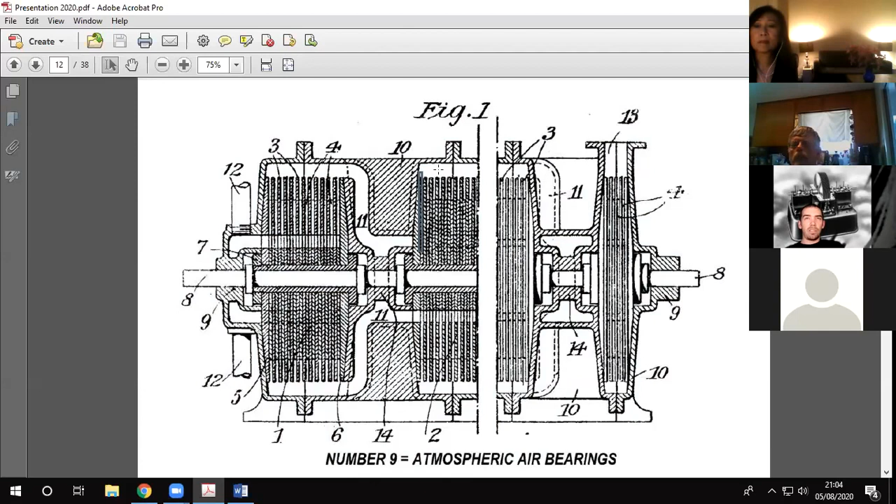Then with no tear-shaped holes, the spiral path gets really tight and compresses the air. When you come down to Tesla's final design for a vacuum pump, this rotor chops the air and smashes it, then compresses it. So the air then goes into a second stage, which has finer tolerances between the discs, and again gets smashed and compressed to the outside through centrifugal force, then it goes into the third stage and is ejected, which again has even tighter gaps.

I have actually found a reference, I'll see if I can find it, where Tesla describes that - let me think - Tesla tornado.

Tesla's got an article called Breaking Up Tornadoes. Very interesting article - it's about sailors who tried to shoot a water cannon into tornadoes. It was the right idea, but the water cannon wasn't powerful enough to disperse the tornado. So Tesla's talking about a radio controlled plane carrying explosives into a tornado to break it up.

There's a hangar housing tornado destroying planes. So basically all the tornadoes that happen in America - or wherever they happen in the world, I know there's quite a lot in America - they don't need to happen. The reason why this is relevant is, hang on.

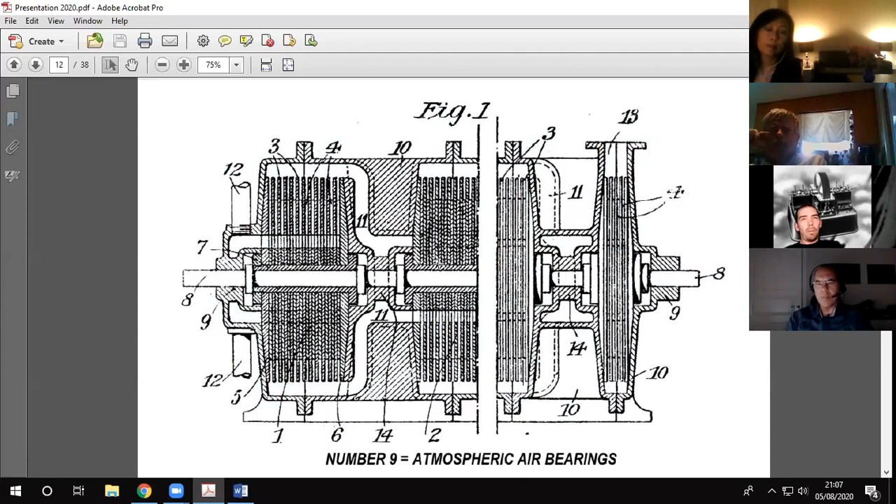I've also found other references - I can't think where to search at the minute - of this being actually the mechanical analog of Wardenclyffe. I can't think where to search from at the minute, but I'll come back to that in a minute.

So other stuff that I've got here, the flying machine that I was talking about earlier - it doesn't work like a normal flying machine. Normal flying machines move air at velocity and use the wings for lift. This is a different beast altogether.

This twin turbine here, in his final design, he actually splits it into - this is the turbine here, because it's got the diverging nozzle, and this is the rotary engine, because it's got the straight port. Now, just to give you a reference of that...

Right, if I type in... right, so...

Here it says, this is the US turbine patent, by the way: in order to bring out a distinctive feature, assume in the first place that the motive medium is admitted to the disk chamber through a port, that is a channel which it traverses with nearly uniform velocity. In this case, the machine will operate as a rotary engine, the fluid continuously expanding on its tortuous path to the central outlet. The expansion takes place chiefly along the spiral path, for the spread inward is opposed by the centrifugal force due to the velocity of whirl and by the great resistance to radial exhaust.

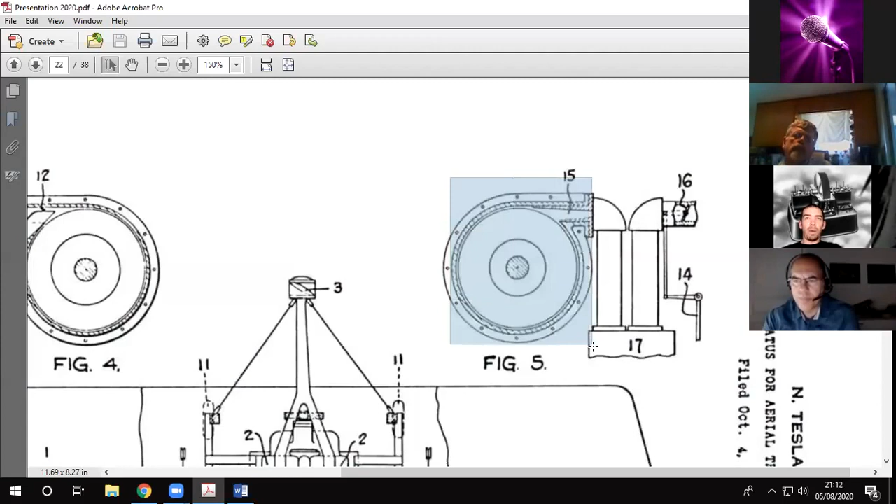So the hotter the gas, the vapor that comes into here, the faster it's accelerated. So that is what I understand - this part is used to make the machine move faster or slower.

The circle there is actually the exhaust, and the shaft doesn't exist. The rotor in this is shaftless. It's shaftless, and the rotor is fitted onto a hub, and it's balanced on a flexible shaft. The second part, there's two parts: there's a turbine and the engine, the rotary engine.

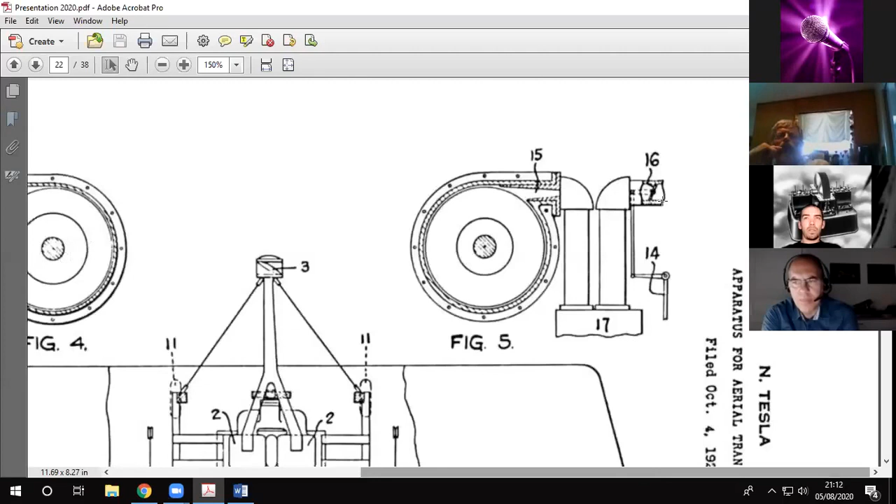So here's the rotary engine, which for the throttle has got this plunger that moves in and out. So when it stops, just like a car, there's an idle stop. So that keeps it spinning. And the idle speed is supersonic. Periphery speed, the outer edge.

Again, the rotor is shaftless. The exhaust is bigger on the rotary engine than it is on the turbine, and this rotary engine is responsible for lift. So this is responsible for lift, and this is responsible for acceleration. And the engine can be pivoted in the direction of travel. So if you wanted to, hang on, if you wanted to,

Paul? Yeah, we've gone 1.5 hours already. So yeah, we've got to wrap it up. Okay, I'll wrap this up pretty quick then.

If you wanted to go up, the engine and turbine are pointed in the upper position. The propeller on here isn't real, wasn't needed. The wings again are not needed. This uses air mass rather than air velocity, and it uses gyroscopic precession to create lift along with the air mass being moved. He only put the wings and the propellers in and the fuel tank just to please the patent examiner.

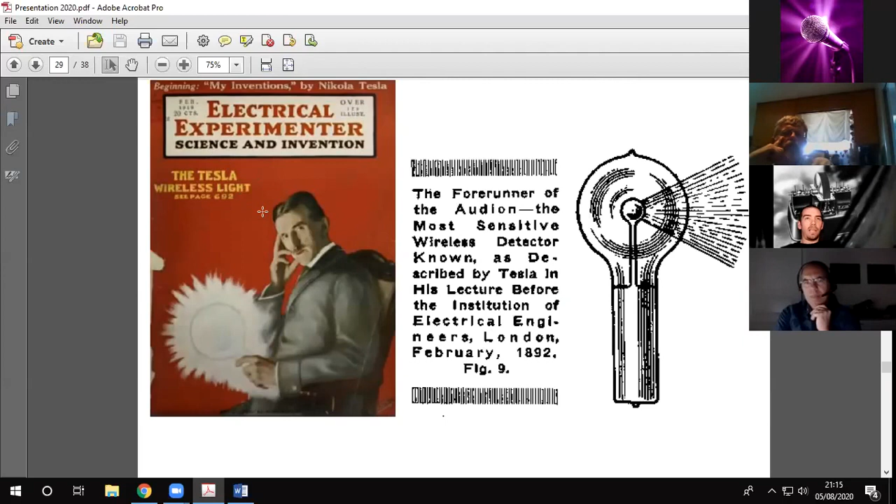I suggest you look up that lecture, look at this here. I'll be releasing this PDF that I'm running from. The rotating brush bulb is the missing component in the Tesla coil. It's the part that enables the wireless communication through the earth. This terminal here is the Tesla bulb. Rather than sending a balloon into the upper strata with a wire attached, this bulb has two envelopes of a vacuum of different amounts, and this bulb simulates sending a balloon into the upper strata.

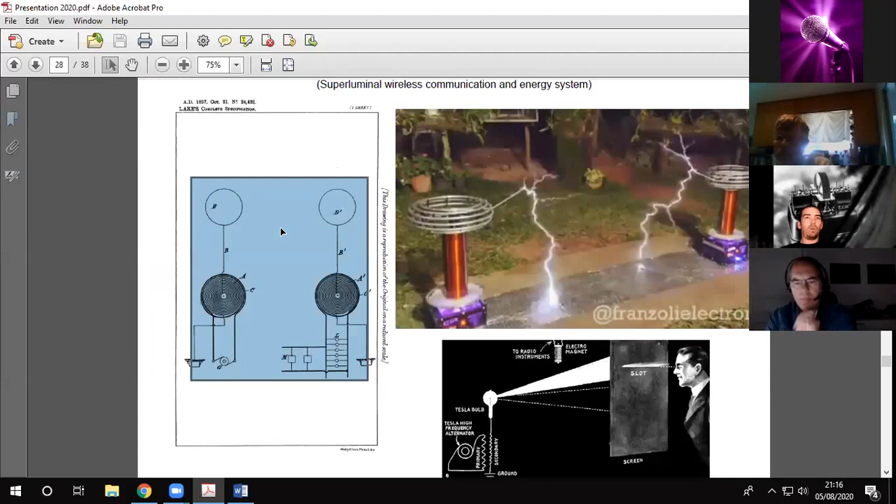So the twin turbine on the flying machine is the mechanical analog of Tesla's wireless transmission system. The twin Tesla coils that you're all familiar with, instead of the capacitive top load that shoots sparks, should have the Tesla bulb. I mean, this is Tesla's own article. That's from there. These drawings are from Tesla's own lecture. And this was Wardenclyffe, the glass blowing part that was blowing a giant bulb for the top of Wardenclyffe.

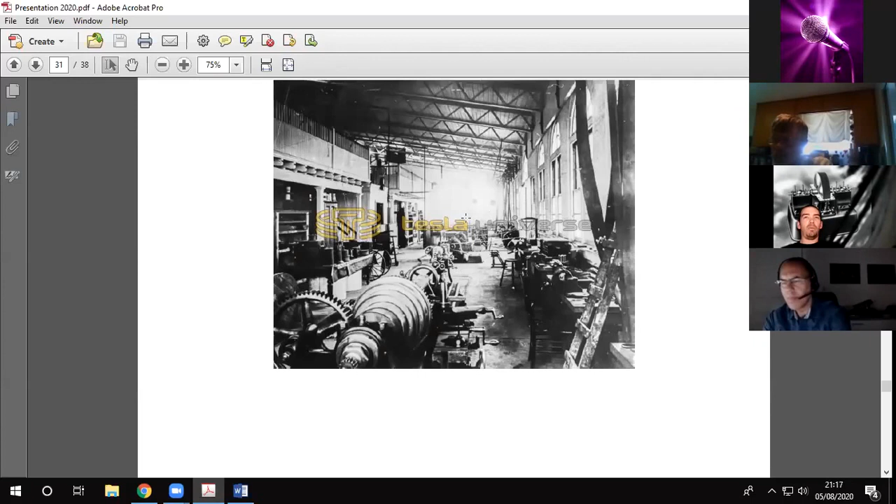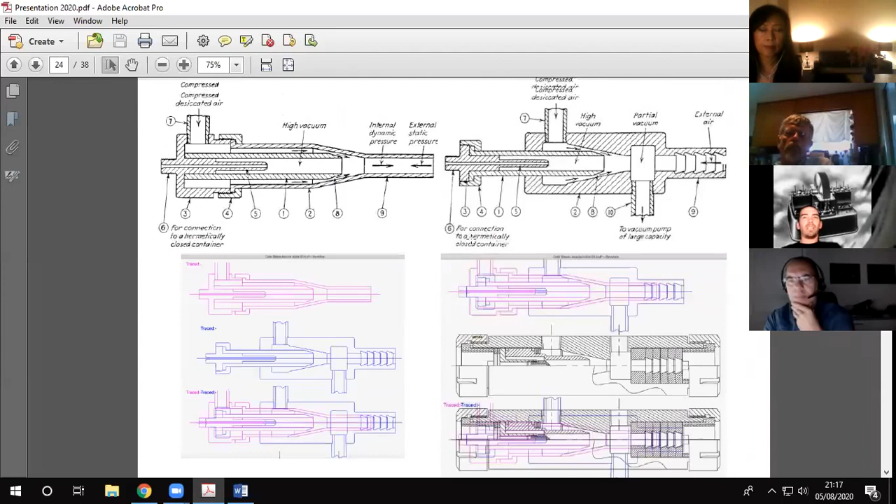But yeah, there's some bulbs that I've replicated with a master glass blower for Eric Dollard in America. There's this low pressure superheated steam boiler internals. I'll have to leave a link to this, but Graham has also replicated Tesla's cold steam nozzle from 1935. And so far we've got it to boil water at 60 degrees Celsius using 100 PSI. That was only the first attempt. It's coming over soon to do some more. And there's Tesla's airship for over 1,000 miles an hour. So I'll leave it there.